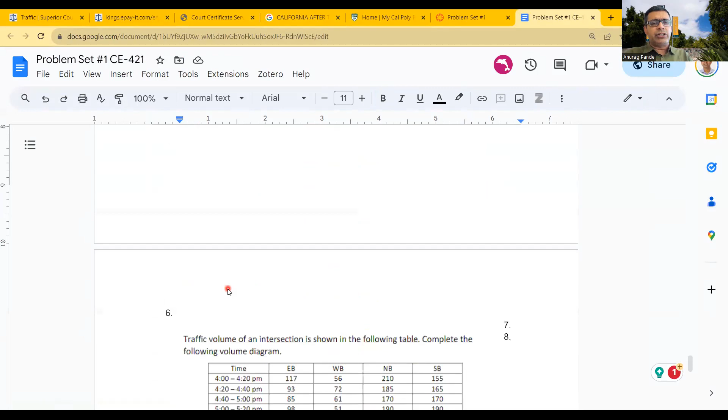These are essentially 6 problems, some relatively simple. You'll be able to solve about 3 or 4 of them right now, and then once we end lecture today... actually there are only 6 problems total. I don't know why 7 and 8 show up, but I'll take care of that.

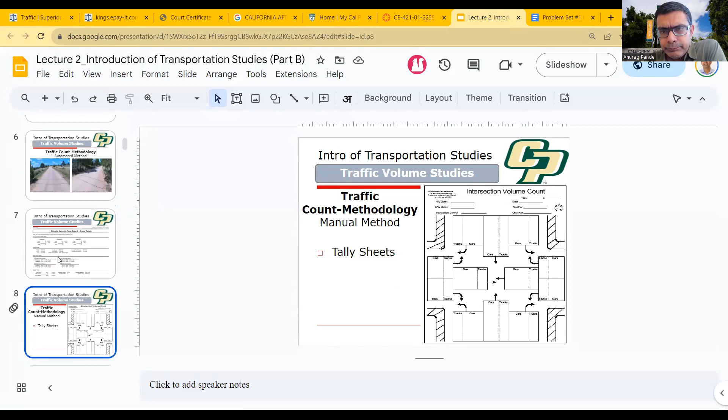Okay, so let's see where we were, talking about these - so these are sort of mechanical boards.

So these are sort of electronic count boards that are now used. They're pretty easy to use. Anytime there is a left-turning vehicle, they have the turning movement assigned to them, and you could see what these movements look like. Anytime there is a vehicle making a turn from there, you just press that.

This is sort of the turning movements that might be assessed. The good thing about these is that once you collect all the data, it goes into electronic format and gets automatically assigned as a sheet.

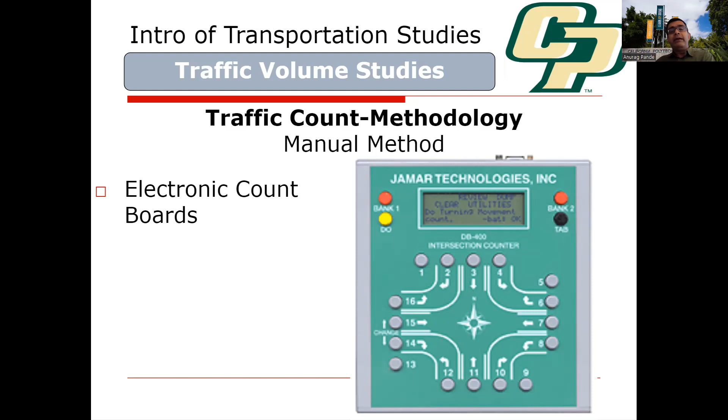The sheet might look something like this. One thing I want to quickly show you is that this is something you'll use in the lab as well. If you go to SLO City traffic data, not the street light data, this Google search - I was reading an article, they are always looking to monetize these things. They even change these queries that I'm putting in. The algorithm or computer system that generates the search results doesn't actually see what I'm entering.

It sees something altered, which generates these sponsored results more often. So there's a lawsuit going on. I was reading about it, pretty fascinating. But anyway, traffic data - if I click on this, I can go onto the link.

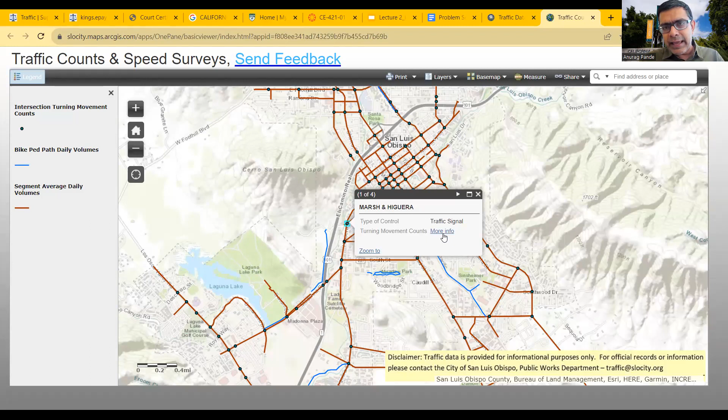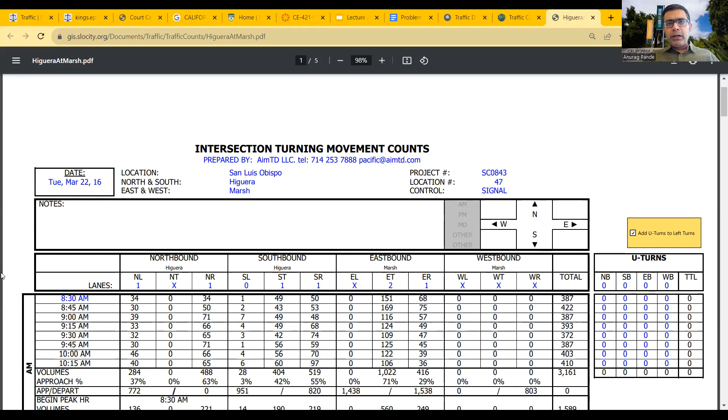This is something you might be seeing, or might have already seen in your lab as well. You can click on any of these intersections and see what type of control it has, and then zoom to it. Once you click on more info, you can actually see the output data from some of these traffic counters. Some of these traffic counters might actually be automatic, not manual at all, but you can see all that data, broken down by through, right lane, and all of that.

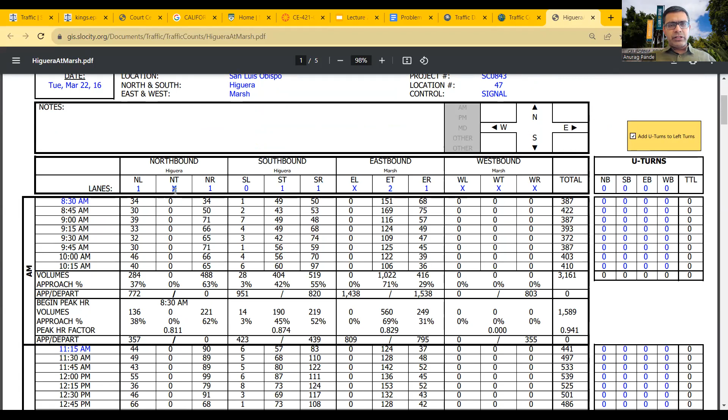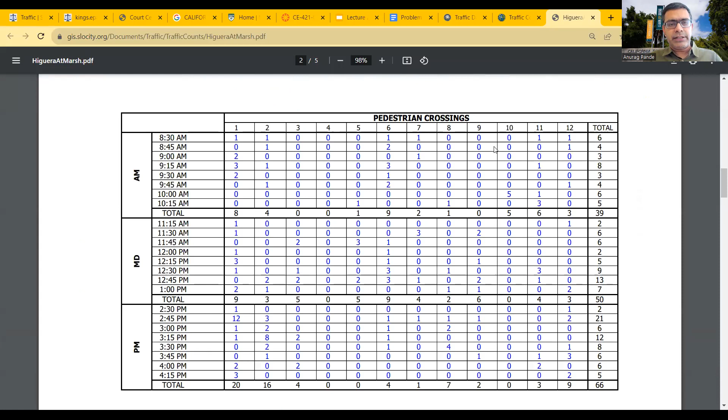This indicates the number of lanes there. If the movement is not there at all, it's just an X. That's why you see only no westbound movement - this might be a T intersection, or just a one-way street, which is what Higuera and Marsh intersection is. You could see the pedestrian data, all of that is in there as well.

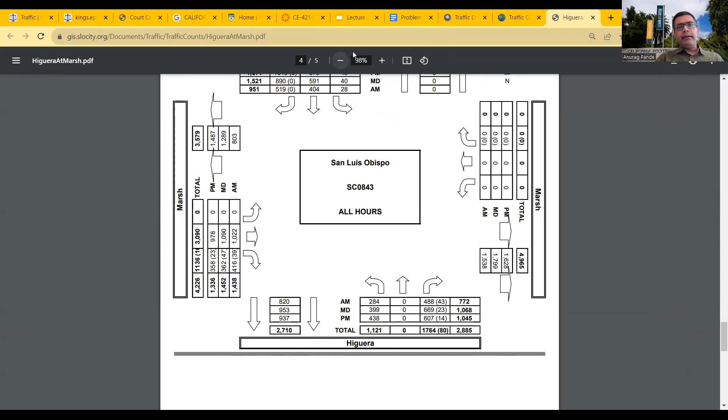All of this data gets filled up into these cells. These sheets can be automatically generated once you connect that device, the data collector, into a computer - either you plug it in, or Bluetooth, or whatever technology we're using. This is the sort of data that comes in, and hopefully you get to work with some of that data in the lab. There's another example shown here.

You know, electronic board output, and you could see that here. Again, through, right, left, and then from north, from east, from south, from west. So sometimes the data is provided like this, but a lot of times it will be like eastbound, westbound - so you just have to be careful about reading these things.

So from west is basically just eastbound, right? And from east is westbound. Just be careful as you're reading these numbers from a sheet, maybe you're taking a look at these sheets to build a Synchro model or a VISSIM model or whatever. Be careful, because as I was showing you in the SLO City data, that's more like northbound, eastbound, southbound, westbound. But in here it's kind of like from west, from east, from south. Just be careful about this stuff, okay?

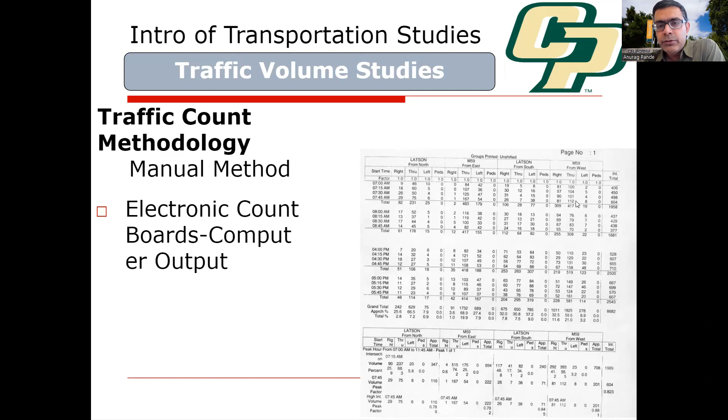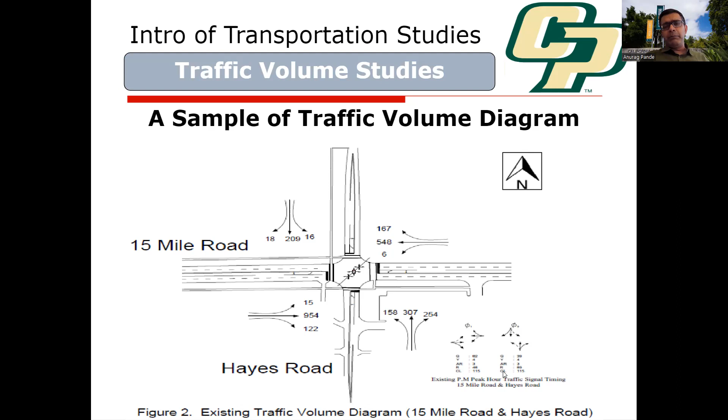So here is the question we left off on: what time should we collect the traffic volume? So what do you think? What time should we collect the data, right? Peak hour, peak hour, yep. Go ahead, you had a point too?

Right, rush hour traffic - unless you've collected the data in previous years, you have some indication of when the peak hour happens, but you don't exactly know all the time when the peak hour happens. So you have to be cognizant of the fact that maybe the peak hour is something you don't know.

So you might have to be a little bit more conservative in your choice of collecting the data - go out and collect data for a broader time interval, and hopefully you find the peak hour. Instead of collecting data for just the one hour you may be interested in, the peak hour, but you don't know what that is.

And this could change from time to time, especially since COVID, as remote work has come in and people are increasingly able to align their work schedule with traffic, or when they have to pick up the kids or whatever. The peak hours might be a little bit more spread out and not at the same time they used to be.

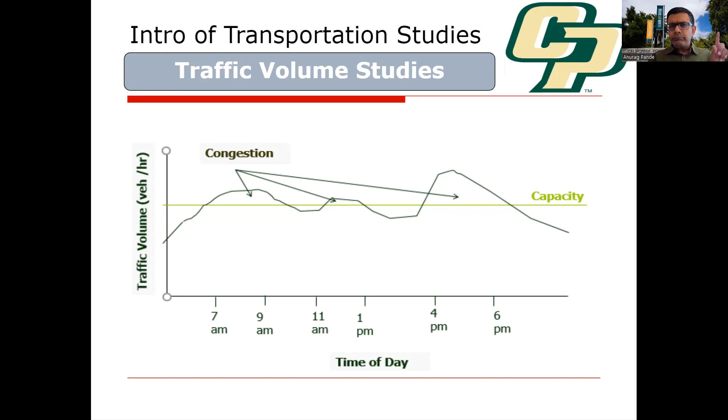Then talk to the person next to you and figure out what you think the approach would be. If you can come up with an estimate, that'll be great. I'll also be very interested in the assumptions you might be making here. Okay, so let's read through this, and then let's take a few minutes to talk about this.

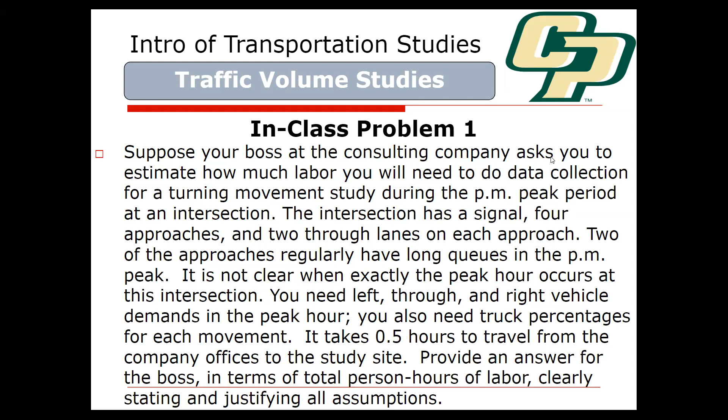Yeah, so this is something interesting, right? Perhaps this will be about what method you could use potentially. So here the assumption is that you probably cannot get the data automatically, because if you could get it automatically through some sources, you would probably do that, since that would be the cheapest way. So let's assume the approach you need is to go out in the field, and you'll have some help of technology, like those automated data collectors I showed you. So you'll have some access to the technology, and you could collect the data real time. You don't necessarily have to record the intersection and bring it back to the office to watch the recording or anything like that.

So that's not what you're trying to do. You can actually go out in the field and collect data with some help of technology. Okay, so that's one thing I'll start with. That's one of the assumptions you can make, that you do actually have to go out in the field and get the data. Anything else that you would want to know about the intersection?

Yeah. I guess a rough idea of the traffic volumes that pass through there, like 1,000 ADT or 15,000?

So that's a good point, right? Would you want to know at the time what the scale of the problem is that you're dealing with? Yes, you would want to know that, because that'll tell you how many people you might need, right? Because if the traffic volume at this intersection is sparse, then you could maybe work with just one or two people.

But if you're dealing with a pretty heavily utilized intersection, like something like Foothill and Santa Rosa for example, then you might not be able to get by with just one person. You might need more people to accurately collect the data, because there are so many movements to track. But what limits the complexity of the job on a signalized intersection especially is that not all movements will be moving together, because certain conflicting movements won't be moving together if it's a signalized intersection. So that limits the complexity of your task a little bit.

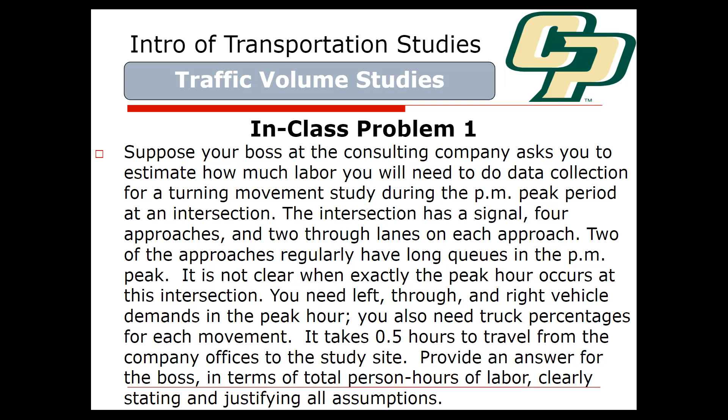Okay, so reporting traffic volumes: daily volumes, ADT - average daily traffic, and average annual daily traffic. With annual daily traffic, we're always collecting data 365 days a year - continuously collecting data and making our estimate.

With average daily traffic, we're only collecting data partially - maybe going out in the field for 3 days, 10 days, 7 days, whatever it is, but less than a year, typically way shorter. A lot of times the data is only collected for 3-4 days in the year, and based on that we make an estimate for the average.

Hourly volumes are commonly used for intersections - hourly volume, equivalent hourly volume, and 15-minute volume. This is the peak 15-minute volume, and I should have said equivalent hourly rate - we get that using the peak 15-minute volume multiplied by 4, giving you the peak hourly flow rate.

For intersections, we're very interested in hourly volumes because a lot of the time their level of service is pretty dependent on that. But even on roadway segments we rely on hourly volumes quite a bit, because for level of service analysis we use the DDHV - the directional design hourly volume. That's what we try to derive.

I'll give you a formula for that in a second. As I was saying, ADT is 24-hour traffic for any period less than a year, typically way less than a year—maybe 3, 5, or 7 days, a pretty short period. But AADT is when you're actually collecting data in the field for the whole year.

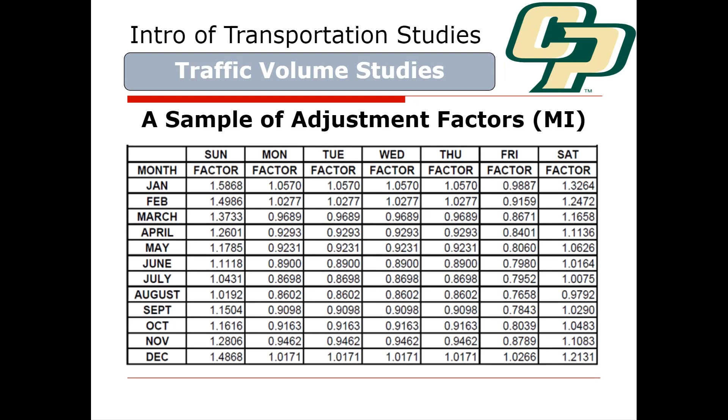So keep in mind you could convert to AADT using published factors for the areas you're interested in. Typically state DOTs will publish that for you—this example is coming from Michigan.

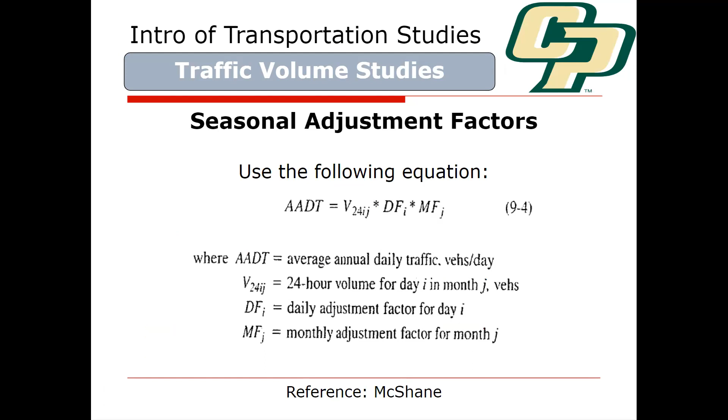This is the formula we use: AADT could be adjusted using the 24-hour volume for day I in month J, in vehicles. DFI is the daily adjustment factor, MFJ is the monthly adjustment factor, and together they form the combined adjustment factor for month and day of year. If you apply both factors, you get your AADT—an estimate, but a fairly reasonable one to use.

This is coming from an old textbook that I used to use for this class, and you can find these tables for your area. Specific factors are not as critical as knowing what these factors ought to look like for a reason, and whether they make sense or not. Anytime you're looking at these numbers, they should always make sense. Typically the DOTs will publish these types of numbers if you need them.

So this is your homework problem: peak hour directional design hourly volume, and this is your K factor and D factor. How many of you have heard of these K factor and D factors before? Has anybody? Where did you hear it?

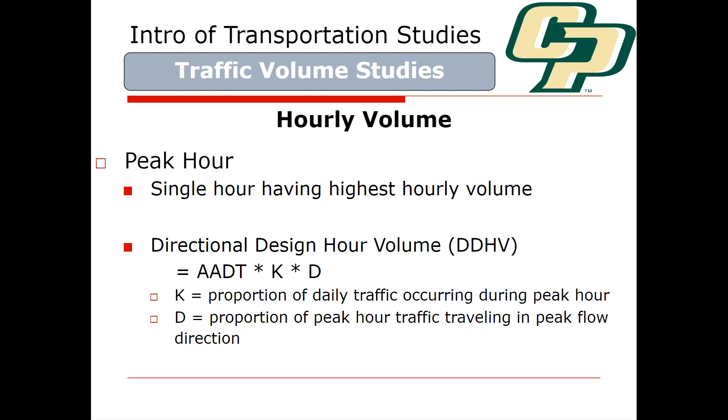This peak hour K factor and D factor vary based on what type of area you're talking about. In rural areas and urban areas, these things differ quite a bit. For example, in urban areas, traffic is usually high regardless of the time of day, so your K factor is normally a little bit lower.

So for a couple of things to note here, in urban areas, the K factor is anywhere between 0.07 to 0.12. That means if you take your daily traffic, and we know that daily traffic is not uniformly distributed over the whole day, you can assume that about 7 to 12% of the traffic happens during the peak hour.

But in rural areas, that number is about 15 to 25%. So in some rural cases, the peak hour traffic could account for almost 25% of the traffic. That's a pretty insane number if you think about it—1/4 of the whole traffic for 24 hours of the day is happening within 1 hour. It's a completely flipped picture. We never have uniform distribution of traffic, but if there were, you'd expect about 4 to 5% of traffic to occur every hour. But here you can see as high as 25% of traffic occurring during one peak hour.

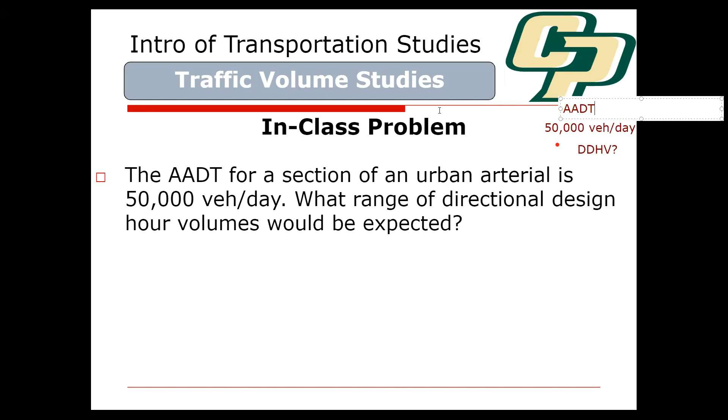How do you go about doing that? It should be pretty straightforward. And I'm asking you for a range, right? That's where you'll come out. So I'm looking for a range, which implies I'm looking for the minimum value of DDHV and the maximum value of DDHV. So what would that look like? Which numbers would you use from here?

Here you'll have to make an assumption whether it's a radial route or a circumferential route. If you assume it's a radial route, you'll get one range. But if it's a circumferential route, you'll get another range. So what's the highest possible DDHV that you will get? How would you get that? Based on this number right here, and looking at these numbers.

So let's see if we can take a minute to estimate that range.

Yeah, it's urban. Urban is mentioned in the problem, actually. I don't have that problem pulled up here, but if you go back to that slide, urban is in fact mentioned in the problem.

So to get the minimum value of that range, what K factor would you want to use? 0.07, right? What D factor would you want to use? Again, I don't think I'll combine whether it's a radial or circumferential route, so I won't combine that into a range. I'll probably make an assumption because that doesn't make sense to me, providing a range for both radial and circumferential that combines the two.

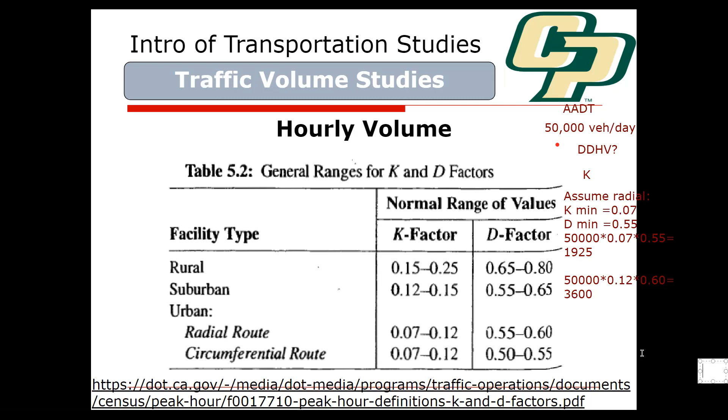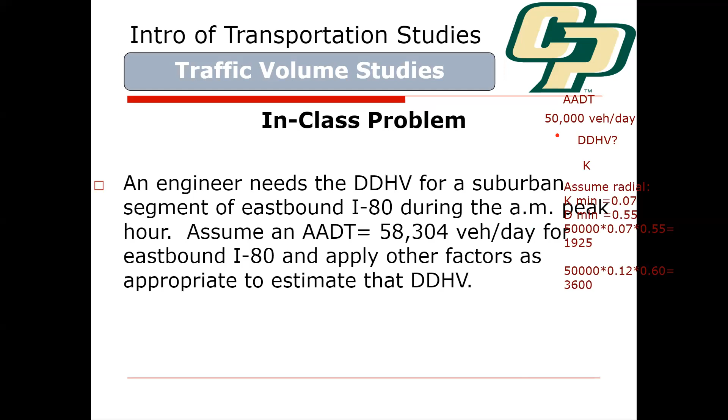Let's talk about this: a suburban segment of eastbound I-80. I'm trying to estimate the DDHV for eastbound I-80, suburban segment, AM peak. Again, you'll have to estimate the K and D factors and then go from there. I'll let you guys work on that a little bit.

And then peak hour factor. This is sort of the peak 15-minute volume relationship between hourly volume and the maximum rate of flow within the peak hour. PHF is the peak hour factor, equal to hourly volume, capital V, divided by the maximum rate of flow that you're going to assume. One thing to remember is maximum rate of flow - anytime you mention rate of flow, it's measured per hour. I mentioned that before, but I'll reiterate it here.

Sometimes on freeways we might consider the same idea but with 5-minute volume. On intersections, most of the time we take 15-minute volume and multiply by 4. But sometimes on freeways we get every 5-minute data and multiply by 12 to get a good sense of peak hour factor. We take the worst 5-minute volume and multiply by 12, because we're converting that into flow. So this formula becomes 4 times V15, or 12 times V5.

So for freeways, the formula becomes: capital V, the hourly volume, divided by 12 times V5 - the 5-minute volume multiplied by 12. On freeways, sometimes we'll consider that to be our formula. The bottom line, the denominator, is called the peak 5-minute rate of flow. So always remember that denominator in this case is always going to be a rate of flow - always convert it into an equivalent hourly rate.

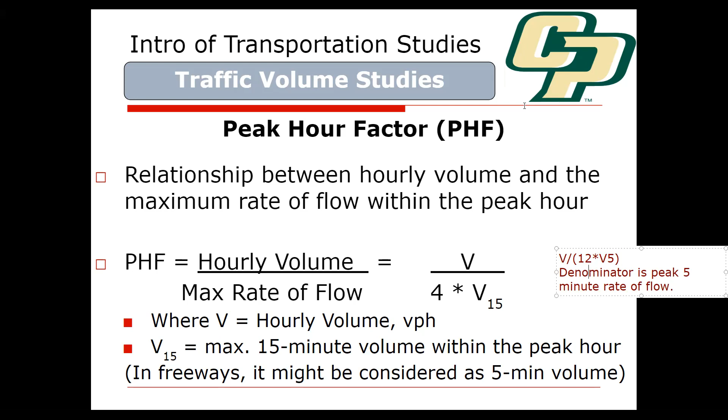1989 - huh, Taylor Swift album. If you didn't know about me, I'm a bit of a Swiftie, right? You know that. All right, you should probably know that. I couldn't quite afford the tickets to go to the concert, but I'm going to watch the movie. So that's the level of Swiftie I am.